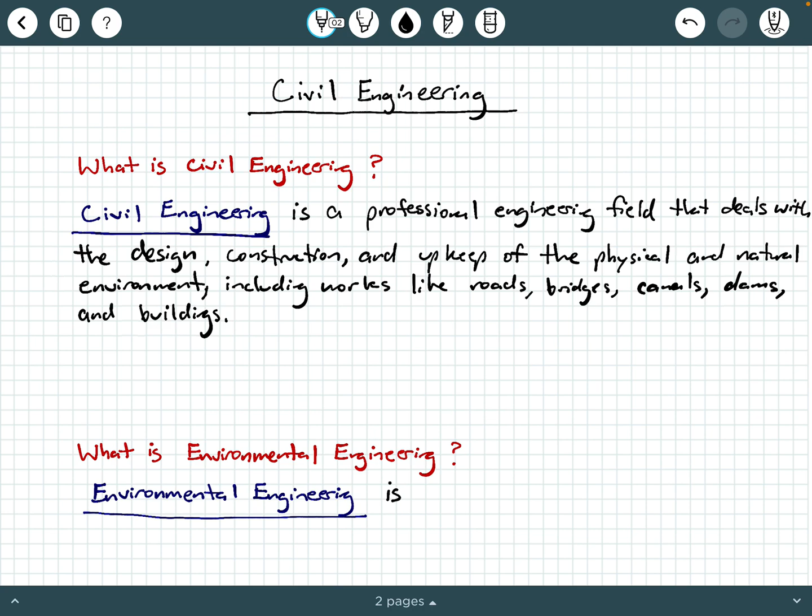The duty of a civil engineer, not engineering, the duty of a civil engineer is to use math and science to design and monitor infrastructure

for the betterment of the health, safety, and welfare of the public. Now I'm going to pause here and I'm going to really underline this phrasing, health, safety, and welfare of the public. This is one of the most important aspects of the civil engineering and really any engineering profession.

Everything you do as an engineer has to revolve around keeping the public healthy and safe and keeping their welfare on the forefront of your mind. So as an engineer, you're going to be using math and science tools to design systems, and in civil engineering, these are systems involving large-scale infrastructure, while always keeping in mind the health, safety, and welfare of the public. Because it's the public who are going to be utilizing the things you design.

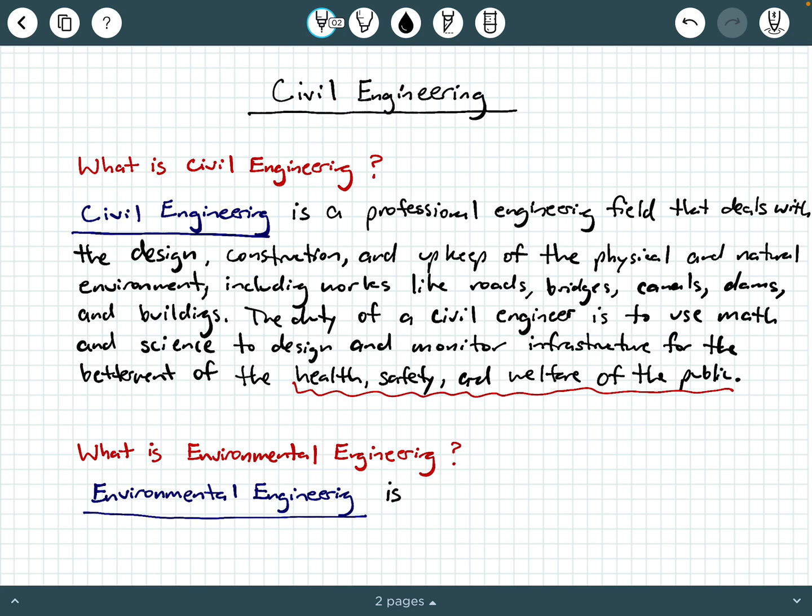But environmental engineering is the integration of science and engineering to improve the natural environment to provide healthy water, air, and land for habitation.

Now, that habitation could be human habitation, or it could be other plant or wildlife habitation, other organism habitation, but it's habitation in general, and most of the time we consider it for human habitation. Okay, now another aspect of environmental engineering is to remediate pollution. Okay, so we're going to write that down.

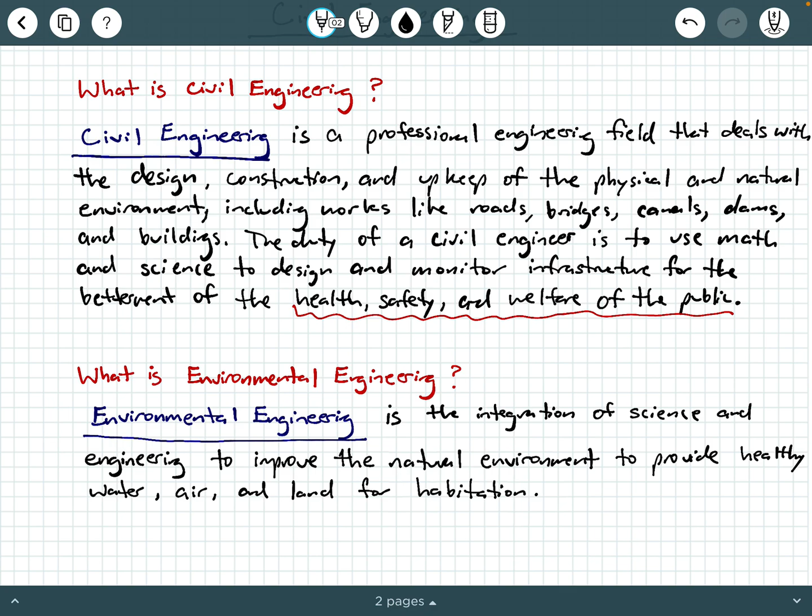Environmental engineering is also concerned with remediating pollution. And of course, we look at a lot of pollution caused by humans, okay? So let me clear up some of this debris that I sprinkled on this page. Okay, so that's environmental engineering.

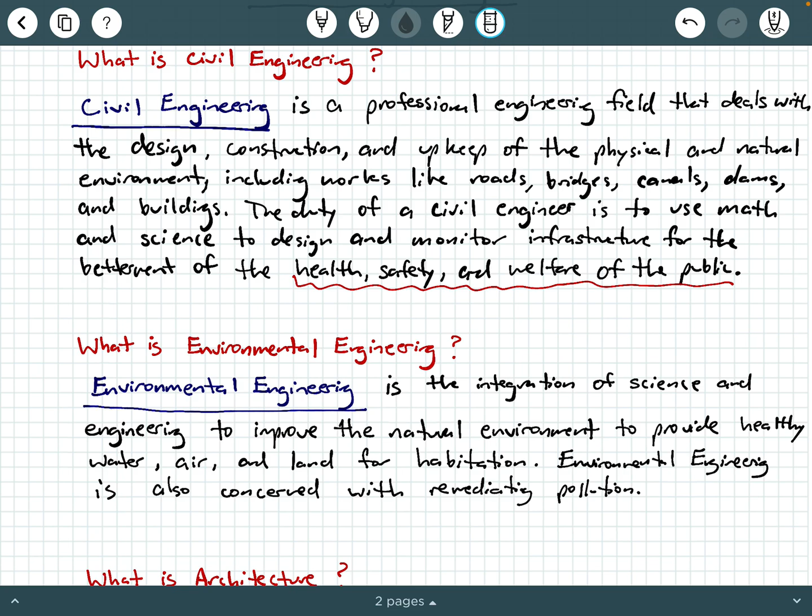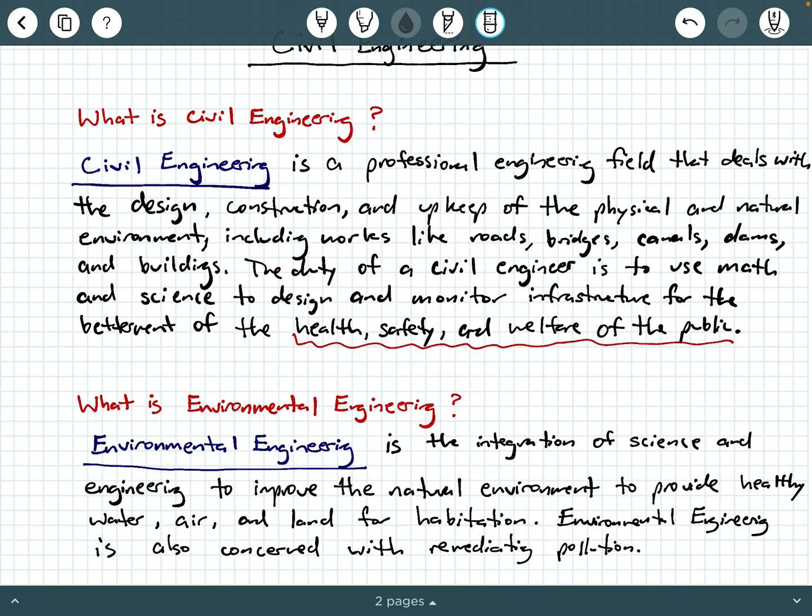Now, a lot of times we see at a lot of universities civil engineering and environmental engineering housed within the same department. And in fact, at Christian Brothers University, our department is actually called the Department of Civil and Environmental Engineering. We've kind of bundled them into one umbrella. At other universities, these could be standalone programs. You could have a civil engineering program or department that is more separated from environmental engineering. But both of these professions tend to work together. Okay. Now you saw a little peek of my next question.

What is architecture? Okay. So architecture is another profession that works alongside civil engineering professionals and environmental engineering professionals. So as a civil engineer, you need to be familiar with architecture and the things that architects work on, because oftentimes as a civil engineer, you will work with architects. So let's define architecture. Architecture is the process of planning, designing, and constructing infrastructure.

Let's see if I can spell that right. Infrastructure that involves the more aesthetic or artistic elements of a project. So, for example, architects will be more concerned and interested in the aesthetics or the artistic aspects of an infrastructure design, but it is more than that.

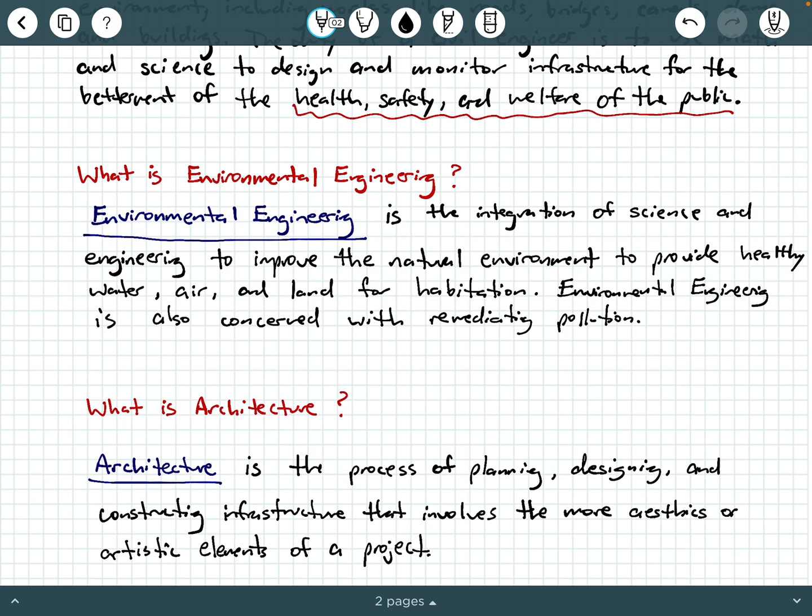So architecture is another professional program that is very important. Architects typically do not utilize applied math and science to the same level that engineers do. So an architect would be someone who is less interested in the math and the science and the calculations behind how something is going to be designed, whereas the engineers are the ones utilizing more of the applied math and science behind how a project is going to be designed and then eventually built. But they all work together, okay? So let's scroll on down. I have another question here.

What are the primary disciplines that we see within civil engineering? So civil engineering is a big umbrella, and it has several different subfields or concentrations within it. So in most civil engineering programs at universities, you're going to take a couple of different courses in each of these disciplines that we're about to list here. So what are they? If you want to try to name them on your own, maybe pause the video and see if you can do it, but I'm about to list them right now. One of the disciplines in civil engineering is called structural engineering.

Structural engineering. Structural engineering uses a lot of math and physics to design structures like buildings and bridges, okay?

Another discipline in civil engineering is called transportation engineering. Transportation engineering is the field within civil engineering that uses a lot of math and usually a lot of physics to design roadways, traffic signals, intersections, railway design, basically anything that involves physically transporting things, and the conduits through which things are transported, like roadways.

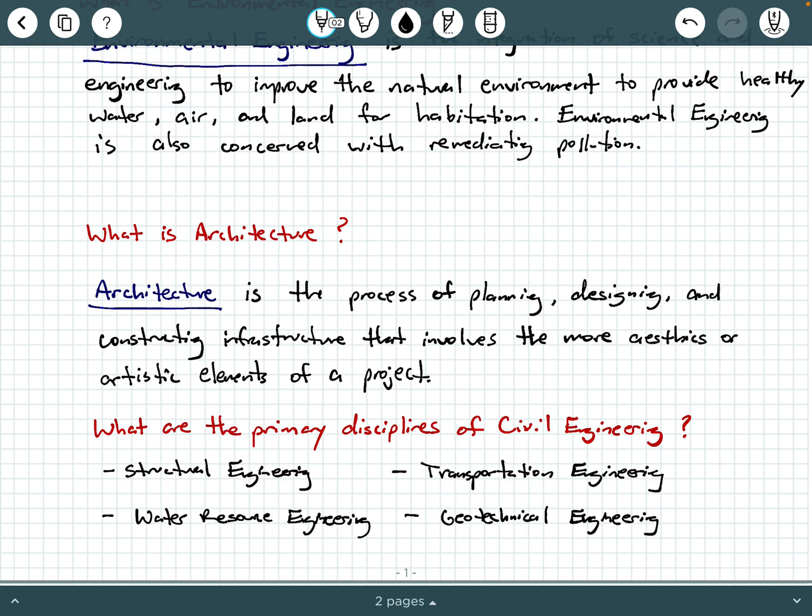And then the fifth main discipline in civil engineering, of course, is what we've already kind of talked about, and that's environmental engineering. Now, there are some other disciplines that people consider a part of civil engineering as well, but these are the five most popular, most common, and most discussed subdisciplines of civil engineering, okay?

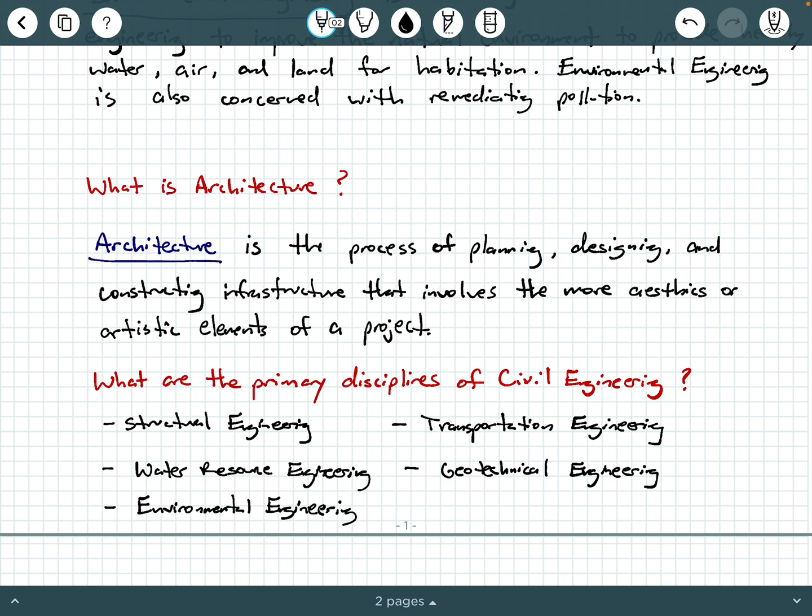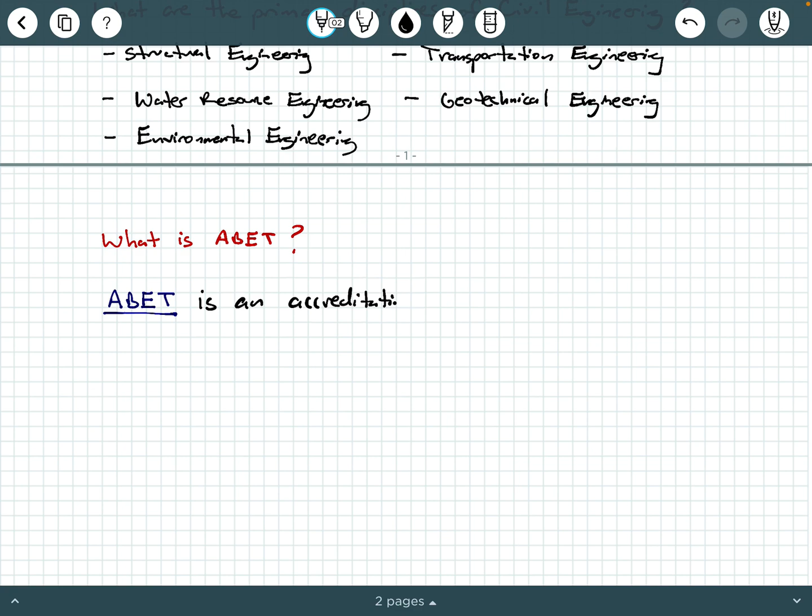So let's scroll on down. The last question I have here is, what is ABET? A-B-E-T. What is this acronym? Well, ABET is an accreditation body that accredits engineering programs. Now, ABET also accredits other types of programs like computer science, some natural science programs, some technology programs. But for our purposes, since we're talking about engineering and specifically civil engineering, that's how I'm going to define it.

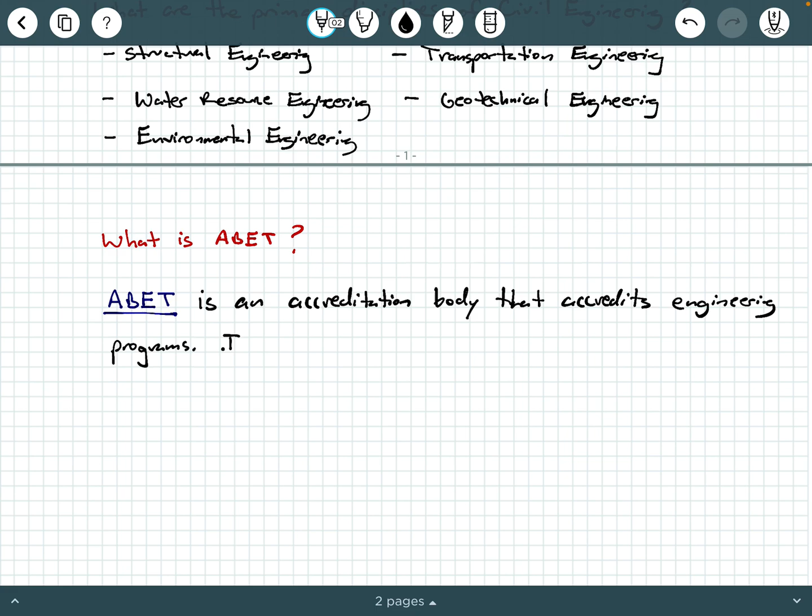So ABET is an accrediting body that holds engineering programs accountable for minimal acceptable standards of the profession when it comes to the professors educating students. It's an acronym that stands for Accreditation Board for Engineering and Technology. So let's write that down. It stands for Accreditation Board for Engineering and Technology. But we typically just shorten it to ABET, okay?

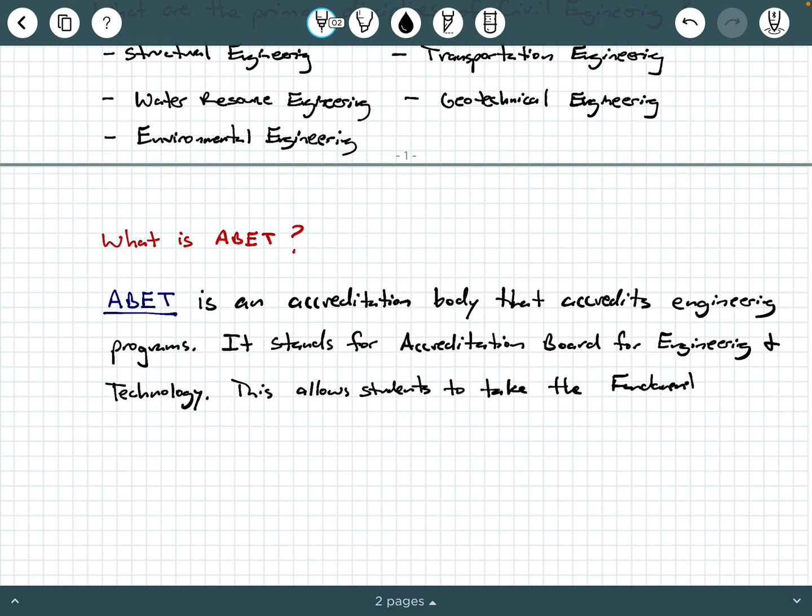So having an ABET accredited engineering degree allows students to do what? This allows students to take the Fundamentals of Engineering, which we call the FE exam, and the Principles and Practice of Engineering, which we call the PE exam. Okay, so the FE exam and the PE exam are a two-step engineering licensure process.

All right, so to become an actual engineer and to have the title of engineer, you have to pass both of these exams. Typically, people take the FE exam at the end of their senior year in undergraduate or right after they graduate with their bachelor's degree. The typical student or recent graduate will take the FE exam in their early 20s, somewhere between 21 and 23.

The principles and practice of engineering exam, the PE exam, is another exam that people take about 4 years after they graduate with their bachelor's degree, although every state will have some different rules and allowances for when you can take it. But a lot of people take the PE exam in their mid to late 20s, after they've worked for about 4 years in industry as a practicing engineer in training, okay? The FE exam is a 5.5 hour long exam, and the PE exam is an 8-hour exam.